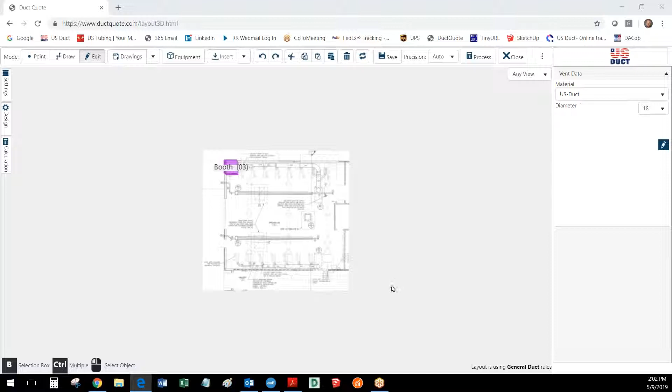Hello there. I've been asked by several people who have seen my 2-minute demo on DuctQuote to try something a bit more complicated, a bit more real life than just 3 simple machines. So I've loaded this floor plan of a welding lab.

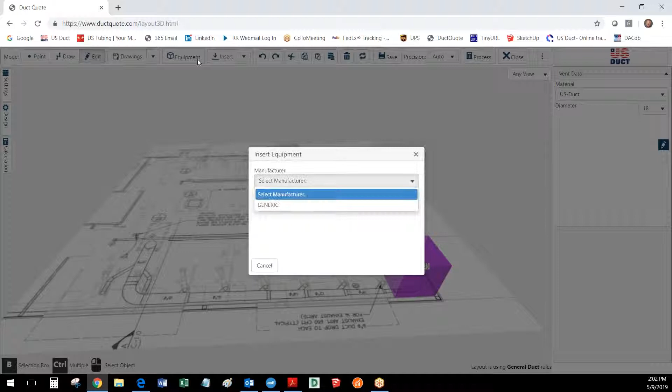And what we're going to take a look at is filling it full of welding booths and ducts. So we've already imported the drawing, scaled it, and put in the first piece of equipment. Now I'm simply going to add a connection to this, and we're going to make it a 6-inch connection because that's what the drawing says. We'll go for, since it's welding fumes, 2,800 feet per minute on velocity, and now we'll simply create the new connection.

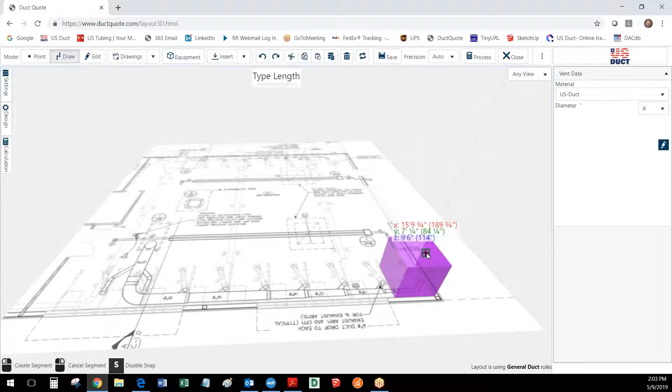And now we're off to the races and drawing. So I go over that connection, come up, and we'll come up 5 feet. I'm going to speed things up by getting rid of some of the labels. It's a little trick that I use.

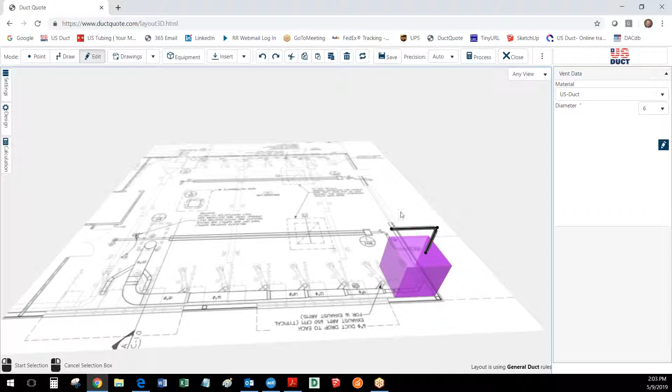All right, so I know that these booths are 7 feet wide, so I know the connections are all going to be 7 feet apart. And we can now start taking advantage of some of the automation that we have in DuctQuote. Before you know it, we're going to have a room full of welding booths.

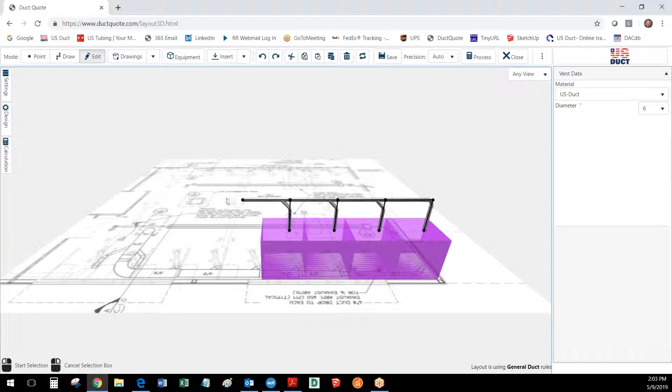And we'll just bring this out to that elbow, and that's going to go up through the roof according to the drawing. So we'll go up 10 feet there.

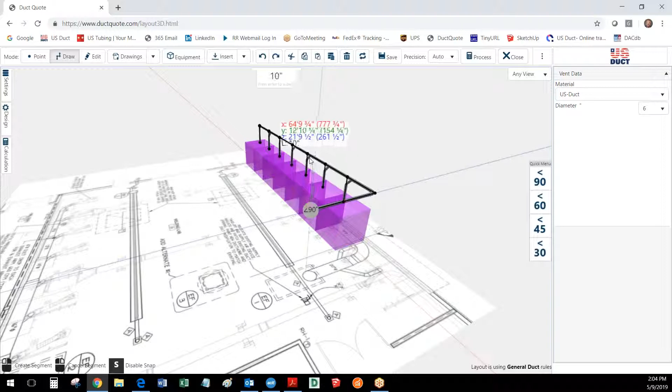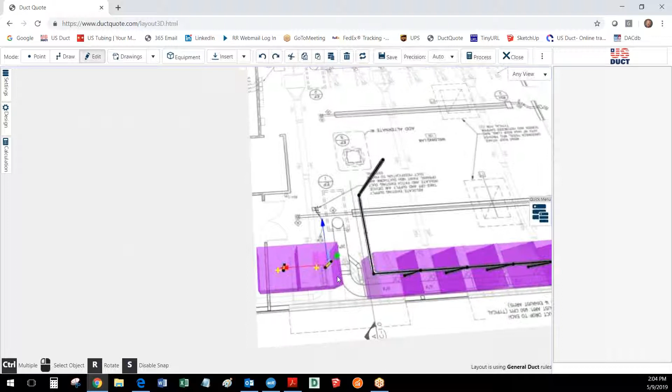And now I notice we've got 2 more booths to stick over there in the corner. So let's take care of that. And we'll scoot around to the side so I can see a little better how to position those. And there we go, use that snap line to bring them in place.

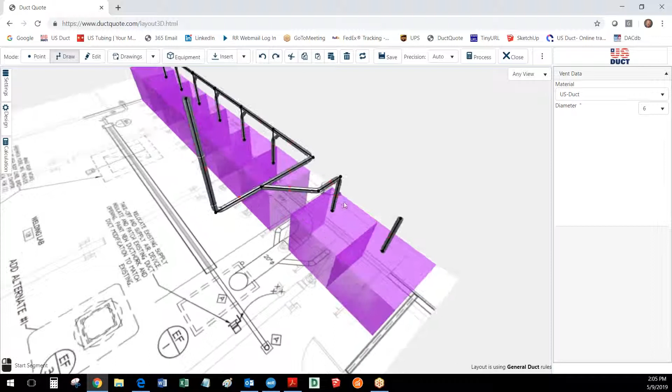And now back to draw. We'll go ahead and connect these into the trunk, and come back, pick that up again using that snap line.

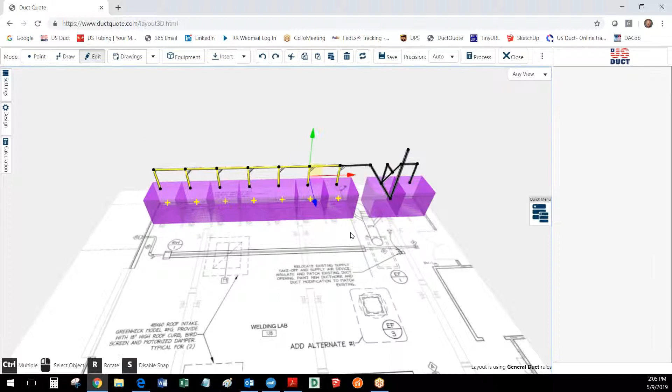So it looks like we spent about a minute talking about things and another 2.5 actually drawing that side of the room. So let's really quick draw the other side of the room, because as you can see...

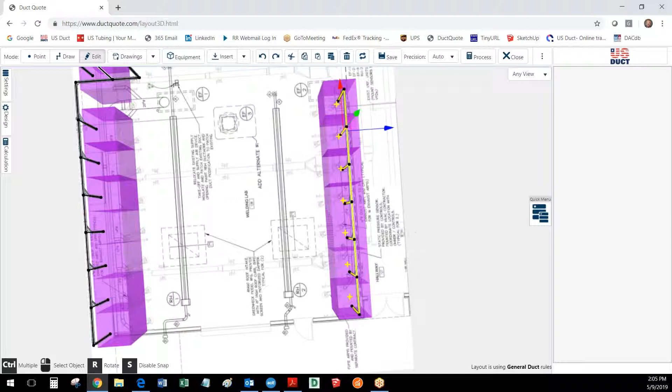Again, I'm going to position this so that I can see things, to snug this back into the corner like we need. There we go.

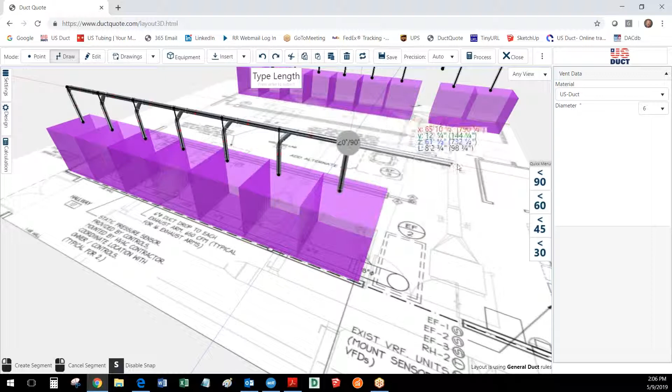And now I'll simply draw this piece here out to the elbow, and again, 10 feet up through the roof.

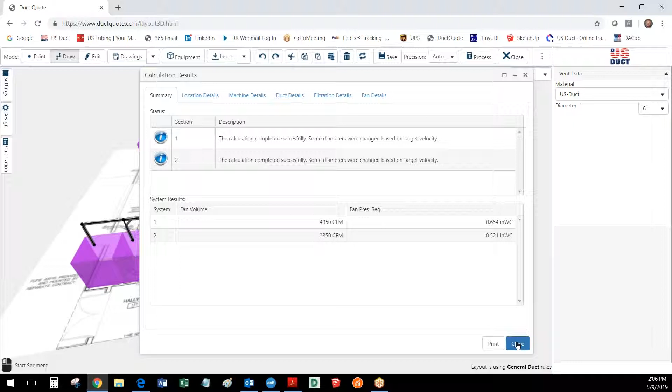And now we have to do, since everything is drawn, is we calculate. Now we've got connections, so we'll use the manual, set that off. And there we go: 2 systems, each 5,000 and a 4,000 CFM, with pretty nice static pressure.

They've been sized, so let's do our takeoff. So we're right at 4 minutes right now, and we've got just about $10,000 worth of materials, list price.

So let's jump right in and generate a nice proposal. We can take the weights off, add our 3D image, and that's a pretty good shot right there.

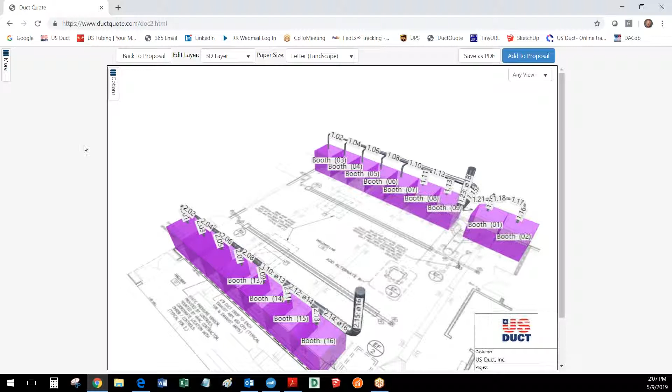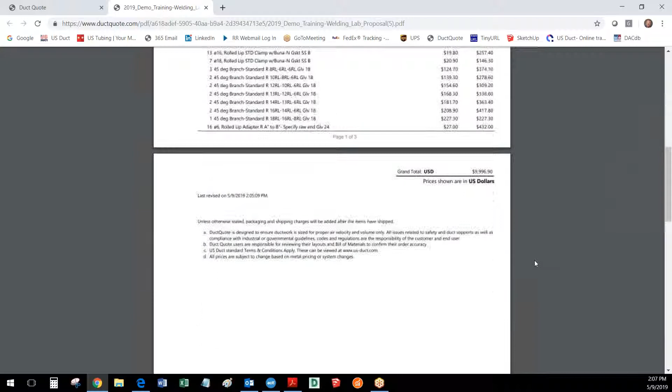Again, remove some of this information, add to the proposal, process. And here we go, ladies and gentlemen, we now have in just under 4.5 minutes a proposal with a 3D image. It's priced, ready to send off to our client.

Now, let's take one more quick little jaunt and say that they have ordered the materials. So what we would now send them is going to be the order of install, and that's the step-by-step, section-by-section, part-by-part installation instructions.

And right there, in just about 5 minutes, we have generated a quote, a proposal that is worth approximately $10,000. Not bad at just about $2,000 per minute worth of work.